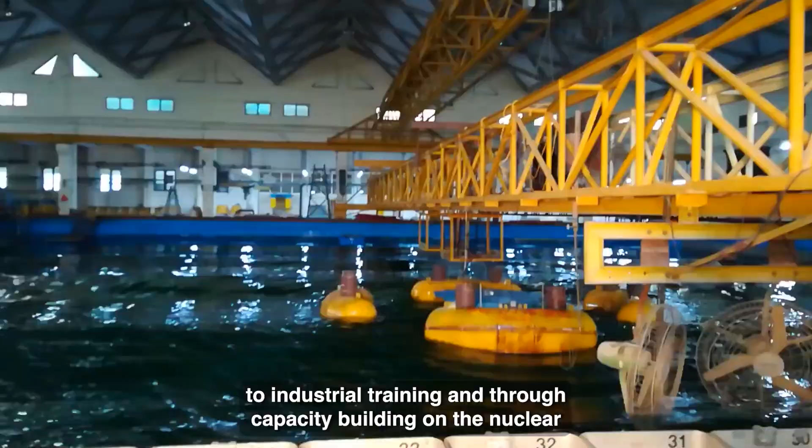This maritime engineering program is a very special, multidisciplinary program with input from mechanical, civil, structural, aerospace, naval architecture, chemical engineering, electrical, electronics, and applied mechanics. It is completely dedicated to industrial training and through capacity building in the new trade of the maritime sector. It's a growing economy offering many job opportunities and research frontiers as India grows, and the Blue Corridor effect planned by the Government of India is one of the important missions requiring maritime engineering growth. This program caters to that expected capacity building.

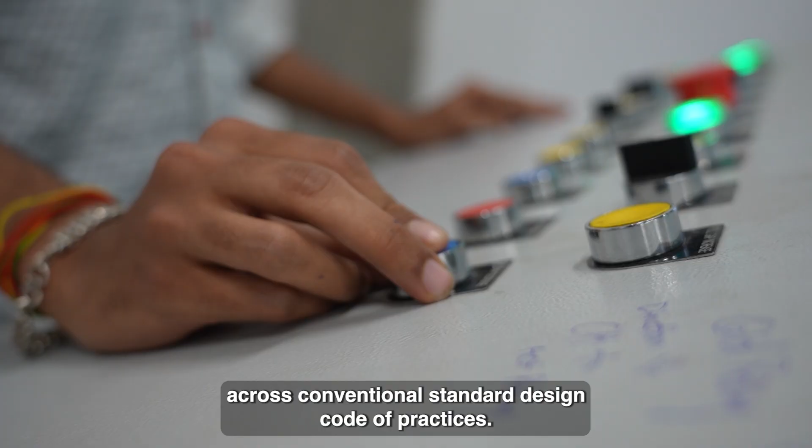This is part of the material science engineering laboratory, one of the teaching aids for the maritime engineering program. When we talk about materials innovation in the maritime industry, concrete and steel have been conventional choices for engineers, but now we have titanium vessels and high-speed craft boats made of fiberglass. These are advanced materials that do not come across conventional standard design codes of practice. We conduct box furnace tests, tube furnace tests, vacuum arc melting, induction melting, vacuum induction melting, and vacuum sealing in this laboratory, which is a small segment of the material science laboratory.

A typical furnace can test specimens at operating temperatures as high as 1200 degrees Celsius. Generally at room temperature and ambient conditions, mechanical properties will not alter much, but as you'll see in the course lectures, the strength of the material gets degraded when the temperature rises beyond 600 degrees. Therefore, in fire resistant design, you must choose an alloying element in such a manner that the strength doesn't degrade beyond 600 degrees Celsius.

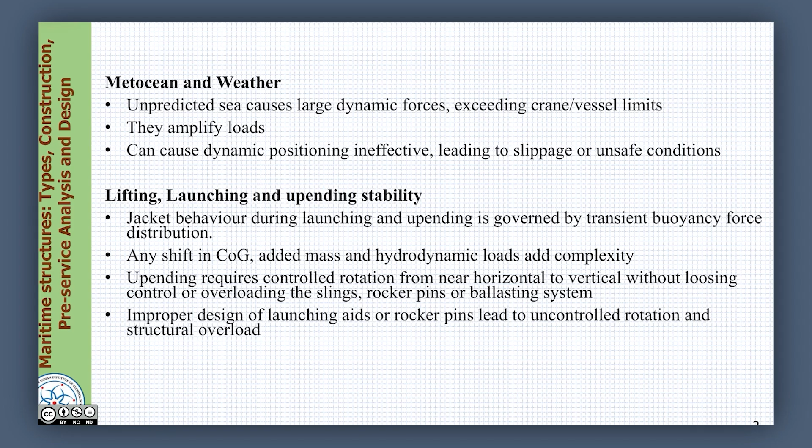When we talk about installation in offshore locations, two important phenomena come into play which govern the installation process: the weather and wave condition, which we call the metocean condition and the wave window or weather window.

Friends, in offshore conditions, sea can be highly unpredictable. Though there are models available to predict the amplitude, period and direction of sea depending upon the weather window and wave climate, we still call sea a random phenomenon.

An unpredicted sea can cause large dynamic effects on structures. For example, if these dynamic forces exceed the capacity of the vessel transporting the platform, or the crane hooking up the platform beyond its limits, it can be a big challenge.

So though you have a vessel or crane of certain capacity, the dynamic amplification caused on the structures by sea waves or wind can make them exceed these limits, and then it can cause a very serious problem. It can even result in capsizing of the whole platform which was fabricated for a specific use.

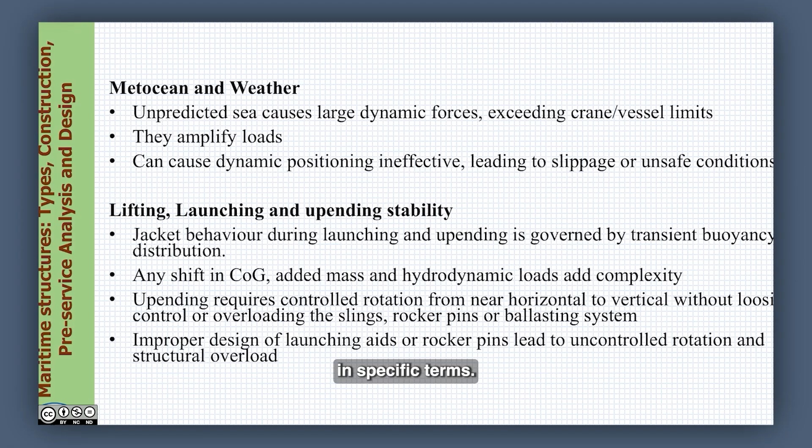So the dynamic effects caused by environmental loads such as wave and wind predominantly amplify the loads acting on them. In specific terms, these dynamic effects are referred to as the dynamic amplification factor.

These are dealt in detail in dynamic analysis of offshore structures. However, we will also touch upon certain effects of this in the coming lectures for our understanding. Dynamic analysis is a full-fledged course offered under the Swayam portal, which you can look into, but for the interest of learners we will cover certain aspects of this in this course as well.

So what we understand here is unpredicted sea waves amplify the load effects, which we call dynamic amplification factors. When these load effects are amplified, there is a possibility they can exceed the barge capacity and the crane capacity as well, which can be one of the major challenges.

Furthermore, it can also cause dynamic positioning ineffectiveness. When the dynamic positioning becomes ineffective, it can lead to slippage or unsafe conditions for installation.

So the installation process is completely governed by various factors: predominantly the metocean condition, the weather window or the wind and sea state conditions, and of course the capacity of the barge, capacity of the crane, and amplification factors, whether considered in design analysis or not. All these factors together can cause confusion or ambiguity in the whole installation process.

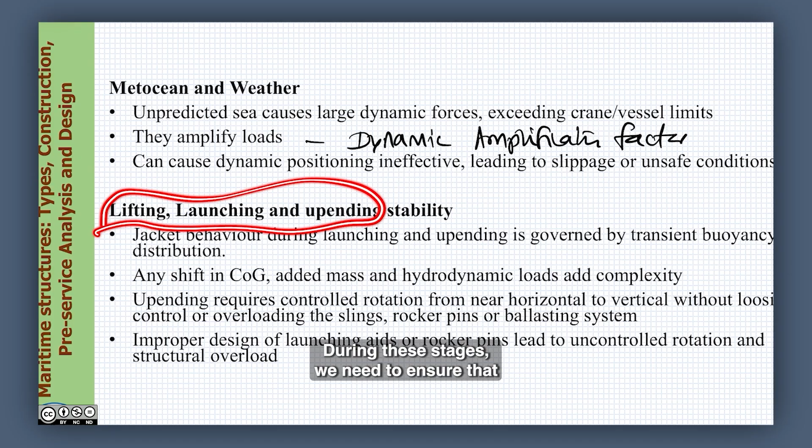During these stages, we need to ensure that not only does the jacket fabricated remain in place, but also that the vessel or barge carrying this during transportation remains stable. So here we are looking at different aspects of engineering.

We are talking about fabrication and welding, therefore we talk about material science. We talk about analysis and design of structures under wave combinations and wind load combinations, so we talk about structural engineering.

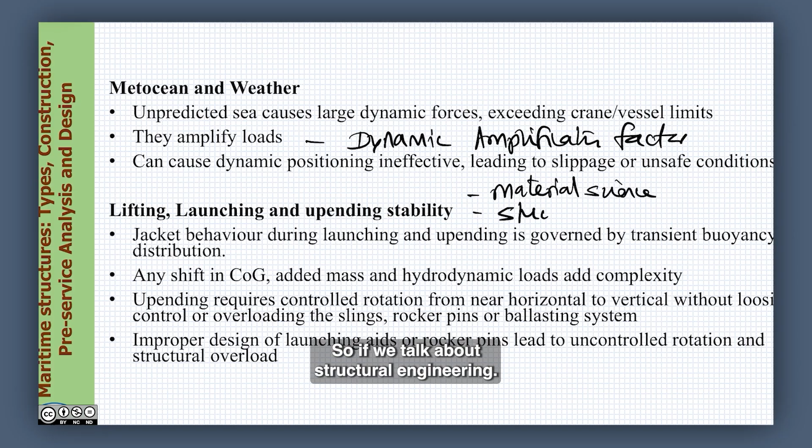We also talk about operations, planning and preparing the installation process, so construction management. And of course we also talk about the stability of the barge and supporting vessels helping in carrying out this operation, therefore naval architecture.

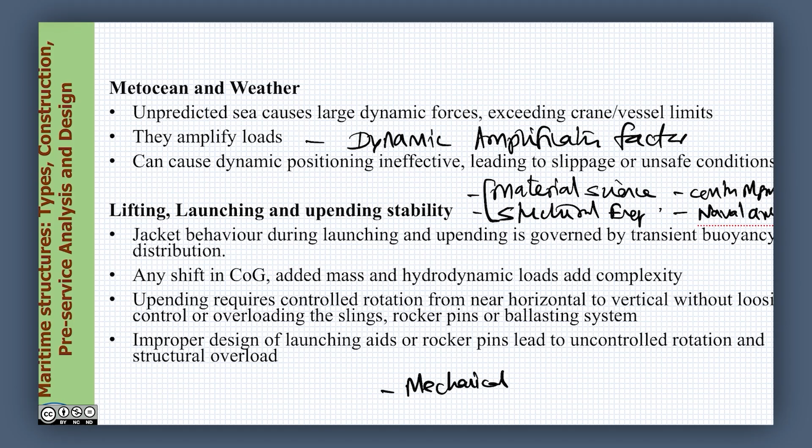So friends, various disciplines and various engineerings are involved looking into it: mechanical engineer, electrical engineer, naval architect, structural engineer, and of course material science and construction executive.

So various disciplines are involved, various specializations are involved. Therefore one can say, friends, installation is not only complex by its process, it is also complex by its knowledge domain.

Having said this, let us look at this specific complexity by imagining that we are going to now launch a prefabricated jacket onto a site of a specific location. The jacket behavior during launching and upending is essentially governed by a transient buoyancy force which is activated on this during the transportation process.

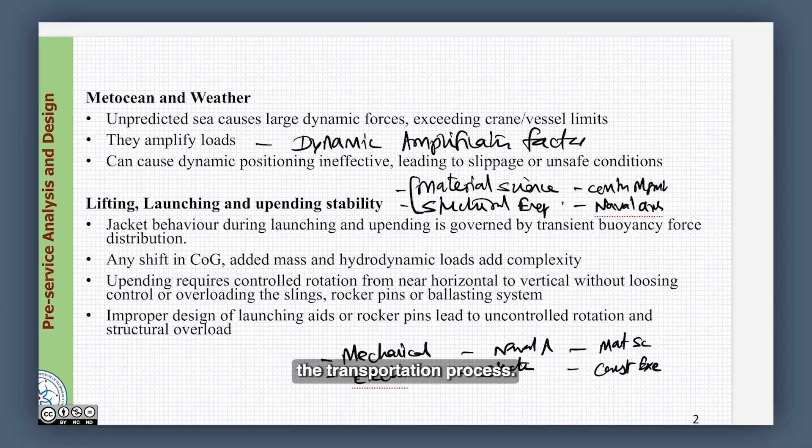When you have a jacket, which I will show step by step in the next slides - when you have a template structure or jacket, the center of gravity, which is the mass center of the elements involved, can get shifted because of its lifting and launching operations.

When there is any shift in the center of gravity, and where there is any added mass caused because of its partial submergence during the launching process, then the hydrodynamic loads acting on those members will further add complexity to the whole process. So friends, it is very important to consider the added mass effect and the hydrodynamic forces acting on the submerged or partially submerged members during the launching and upending processes, which are very important pivotal points in installing a jacket structure.

In this whole process, the mass center or the center of gravity of the whole system gets shifted.

When the center of gravity gets shifted, we understand that the structure retains or attempts to retain a CG by shifting the bodily rotation towards its center. That is a general tendency of any body to attempt to come to equilibrium. We call this specific property in offshore engineering as recentering. We already learned this in detail in previous lectures. I request listeners to go back to previous module lectures and reinforce your understanding before we take it forward from this point.

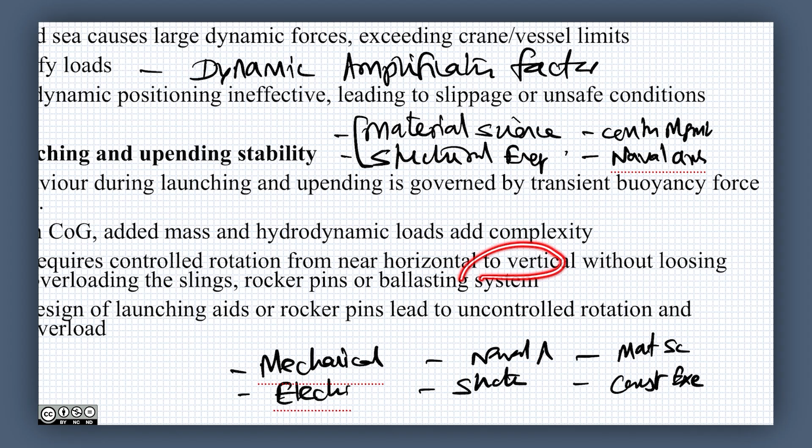So, friends, upending requires a controlled rotation, rotating the body from near horizontal to near vertical. During this operation, we cannot afford to lose control, we cannot allow overloading on the slings, we cannot allow any additional friction or load on the rocker pins or the ballasting system.

The ballasting system is part of the barge or vessel which is transporting the jacket from the fabrication yard to the place of installation. Ballasting is actually adding additional weight to the barge to maintain its stability. Deballasting is removing this weight from the body to again maintain stability. So ballasting and deballasting is a consequential operation that happens in all ships, and in barges as well, to maintain stability during flotation. We cannot afford to lose ballasting control.

Additional rocker loads on rocker pins or overloading on the slings of the crane hook can initiate failure because of slippage from the crane drops. So, friends, lifting, launching and upending stability actually governs the whole operation of installation, for example in a jacket platform. Having said this, let us see what is the further consequence or complication that happens in the installation of a jacket.

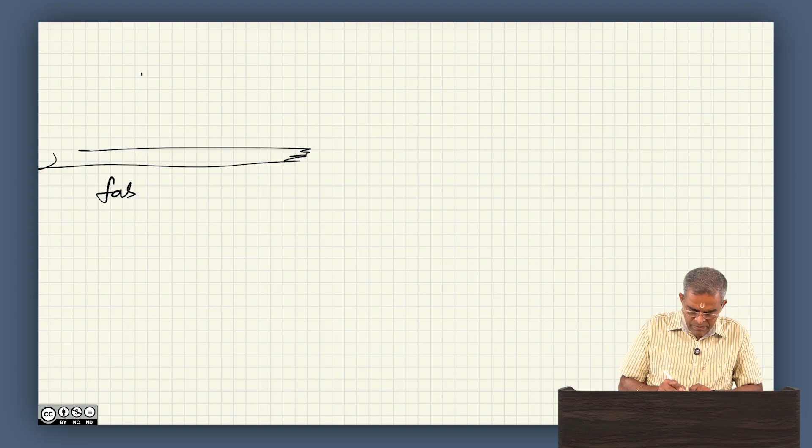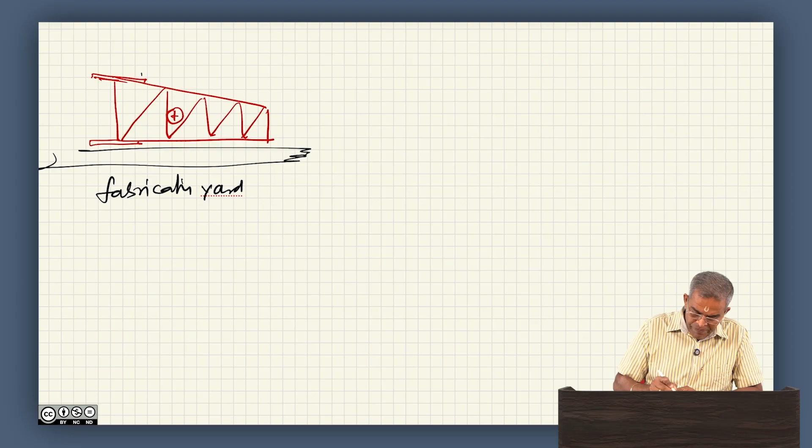Once the jacket is transported, let us recollect the steps involved that we learned in the previous lecture. We said that I have a fabrication yard where a jacket is fabricated. Now, the jacket has got a specific CG or COG where the mass center is located. In the fabrication yard, we have rocker pins, and we have slide rails, where the jacket is virtually pushed along the rail towards the rocker pins. When it is pushed towards the rocker pin, the barge is here. Let me draw the barge as well.

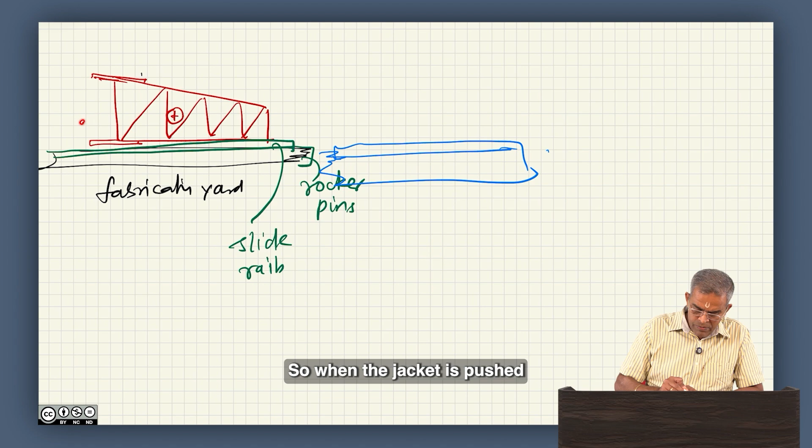Let us say this is the barge. So, when the jacket is pushed and launched on the barge at the rocker end, it is essentially moving, and when it reaches this stage, the barge is partially loaded.

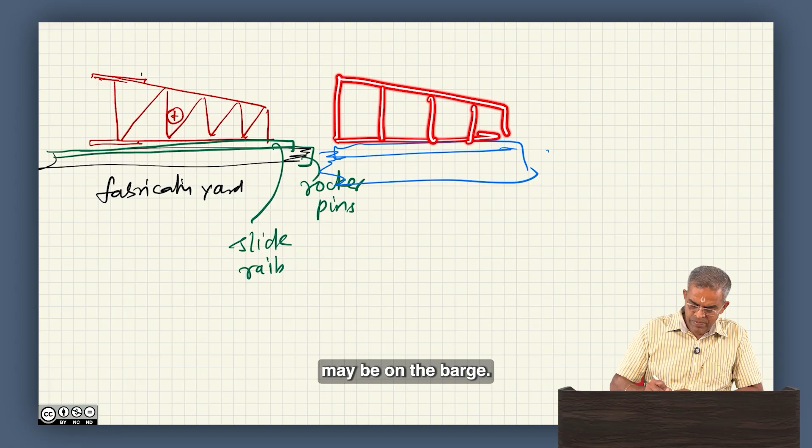Remember that the barge, when symmetrically loaded, is stable. When the barge is partially loaded, there is a probability that it may experience excessive roll or excessive pitch. So, this has got to be controlled by ballasting the barge to create an additional counterweight to balance this. Once the jacket is completely placed in position on the barge, then there can be a perfect balance of load.

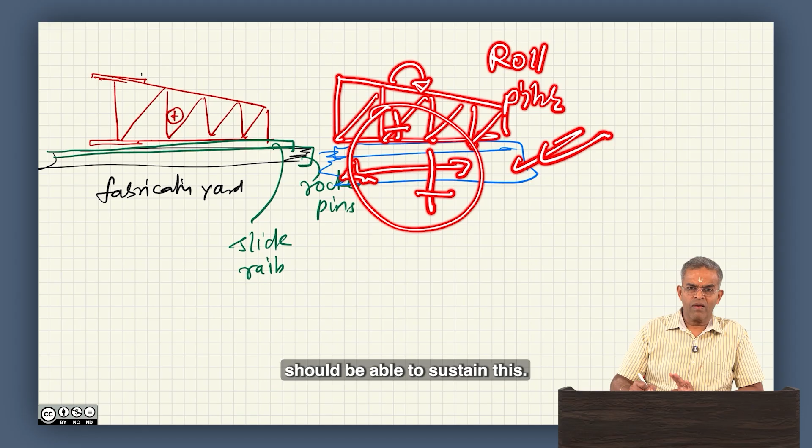Still, remember, the CG of the barge and CG of the platform may not be the same. It can cause an additional moment which can induce roll or pitch to the barge, for which the barge should be able to sustain this. That goes without saying. But however, there is expected to be a balance of the load acting on the barge, for which the barge stability is already ensured.

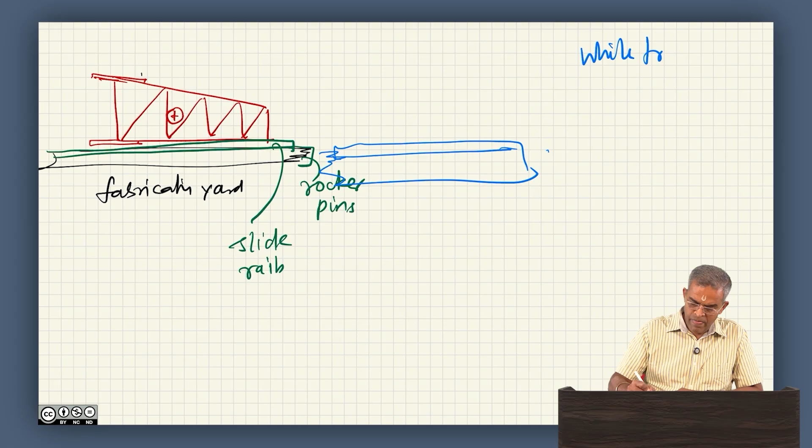So now we have launched the jacket from the fabrication yard onto the barge. Now the barge is moving, we are transporting. When you are transporting, the wind effects while transporting, the wave effect, and the current, in addition to the dead load of the jacket should be taken care of in the design.

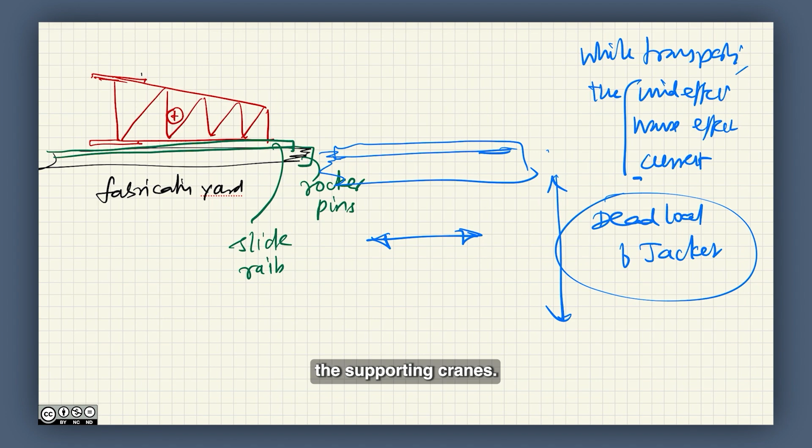The jacket should remain stable during the transportation process. Remember, the barge will also have supporting cranes to help this process. So the jacket placed on the barge will be also held in position so that it does not move.

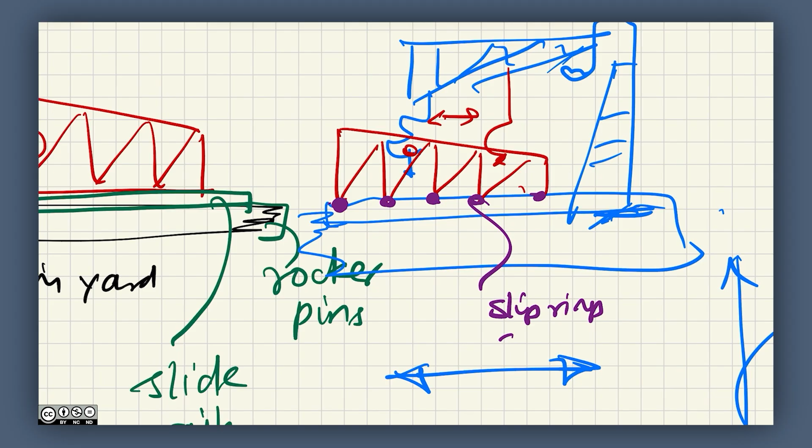In addition to this, friends, both on the barge and on the jacket there are slip rings and sea fasteners, which are placed in position so that the jacket is locked on the barge. You must have seen this, a very interesting operation, which I can give a very simple example to recollect.

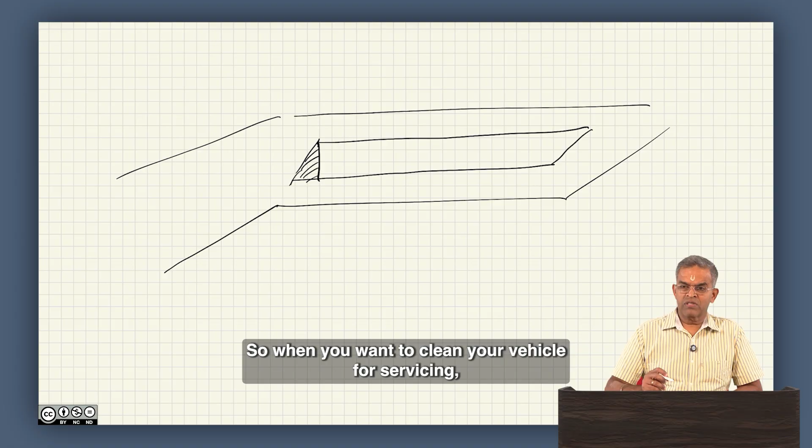Let us say you have a ramp arrangement, and the ramp has got a design like this, whereas this portion is hollow. So when you want to clean your vehicle for servicing, what we generally do is bring the vehicle onto the ramp, and move the vehicle so that the wheels are placed here. Once they are placed here, you must have noticed that these wheels are locked.

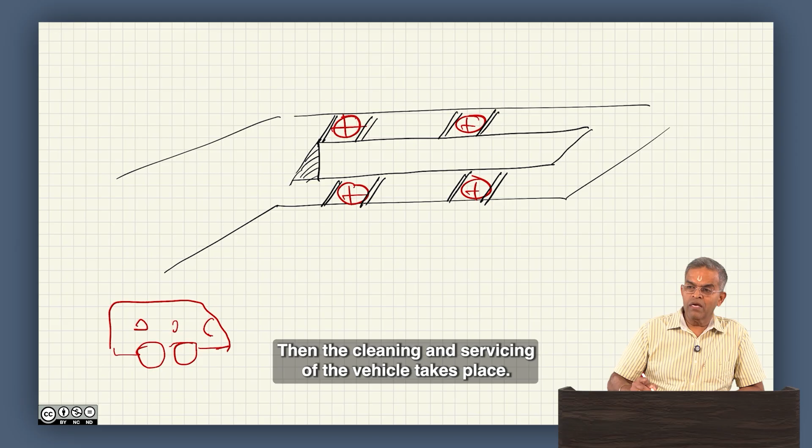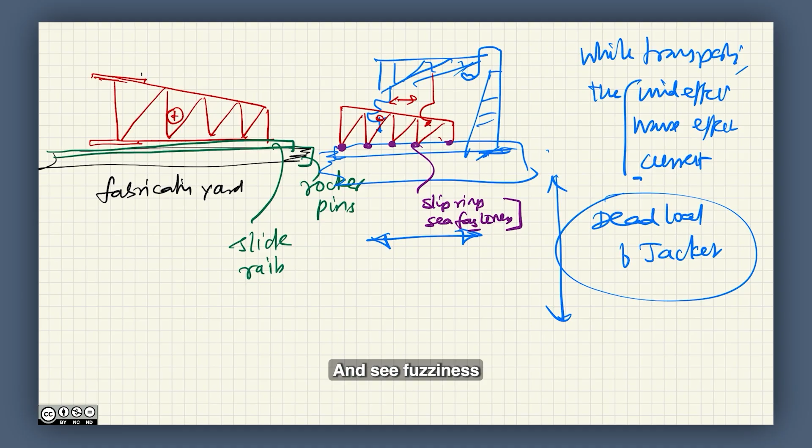Then the cleaning and servicing of the vehicle takes place. Similarly, in aircrafts, when the aircraft is parked on the bay, you would see the wheels of the aircraft are also locked, so that the aircraft does not move when loading, unloading cargo, or passenger embarkment takes place. Similar to this, friends, I have here slip rings and sea fasteners to hold the jacket in place, so that the jacket does not move to and fro or oscillate or slide when the barge is moving.

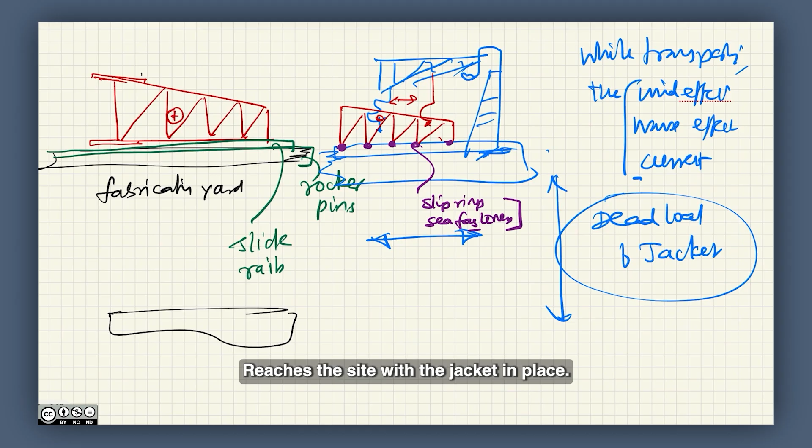So now we have placed the jacket on the barge. Now the barge is moving, we call this transportation. When the barge reaches the site with the jacket in place, now the jacket has got to be placed in position. Let us say this is the probable location where the jacket has to be installed. This is sea level, this is water level.

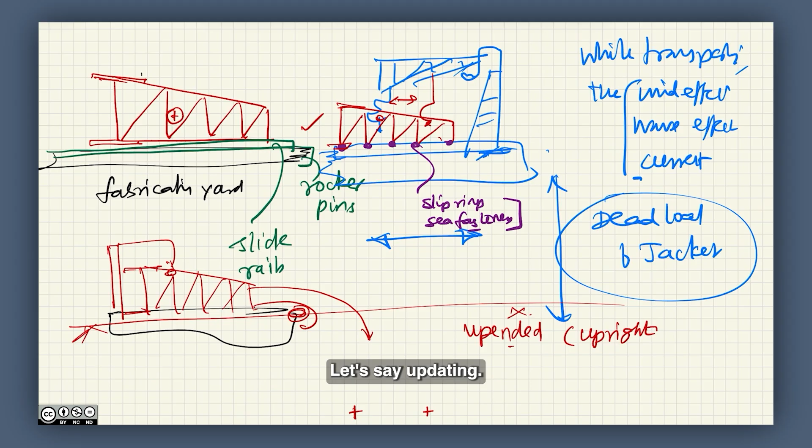So now I have to have a crane which holds the jacket, and the jacket is slided with a rocker in the same manner as you see here, and it is upended — let us say uprighting. During this uprighting, you will notice that some of the members may get partially submerged, some of them may not, is it not?

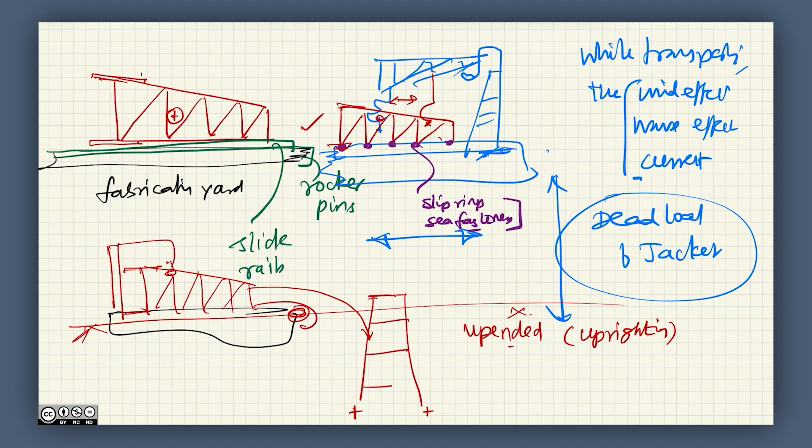The partially submerged members will have added mass effect and additional hydrodynamic forces, for which this should be designed. So now once it is upended and the jacket has become vertical, you have to do the pile driving.

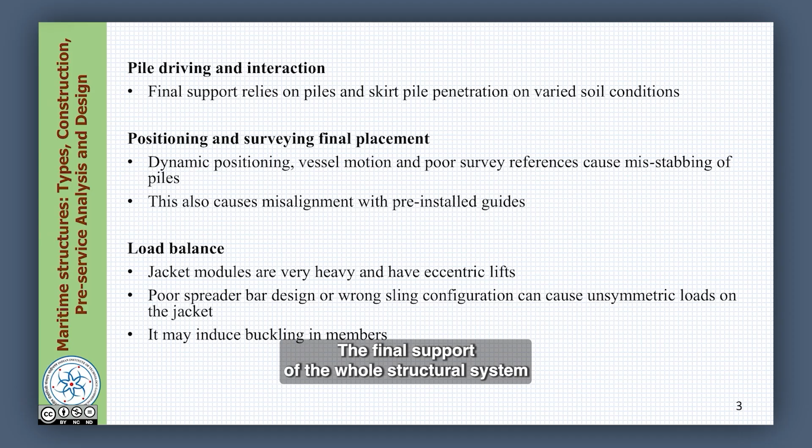So we are now coming to the complexities involved in pile driving and interaction. The final support of the whole structural system relies on how strong and how firm the piles are driven into the seabed and how they are firmly connected to the structural system of the jacket. So the pile penetration and the skirt pile penetration on varied soil conditions govern the important aspect of successful installation of a jacket on site.

When I say pile driving, we are talking more importantly about the soil structure interaction. Remember, friends, on ground or on site onshore, the soil may not be as wetted as it is in sea. Therefore, the marine clay or marine soil conditions and composition are different from that of the soil on shore or on site in ground. They can be different. Even if you have a submerged water table, even then the soil conditions in marine or maritime systems can be different from that of soil conditions under a dry state system on earth or onshore.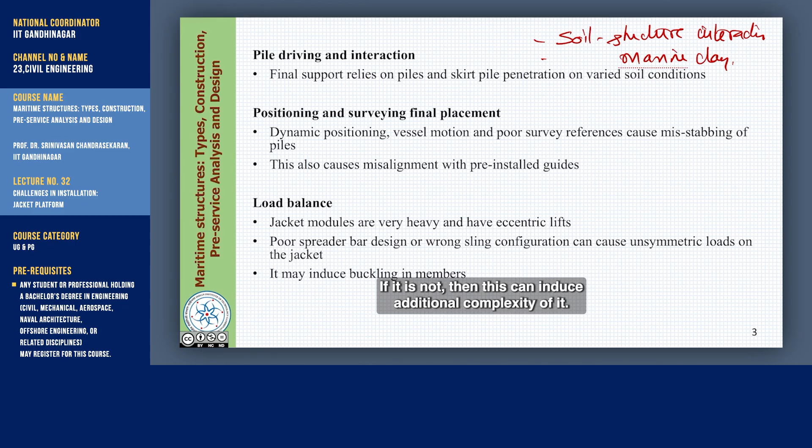Therefore, friends, the pile driving, pile positioning, and then fixing the structural system to the pile properly has got to be taken care of carefully. If it is not done, this can induce additional complexity of failure.

We are now looking at the different processes involved in installing a maritime structure, for example a jacket platform, and looking at every stage how this can induce additional forces which can cause failure or complexities in the whole process. Now, once the pile is driven properly and fixity is ensured, then comes the question of final placement.

What we call positioning and surveying the final placement. The jacket has got to be placed in a specific position, because it is not simply to be placed wherever you want. It is to be placed at a geographic location where oil exploration can take place. So we have identified the spot, we know the location, and the jacket must be placed at the specific location with practically zero tolerance. To ensure that, we need to check the dynamic positioning and survey of the final placement once it is commissioned.

Dynamic positioning, vessel motion, and poor survey references can also induce a mismatch in the whole process of commissioning, what we call misstabbing of the piles. The piles must have been stabbed at a specific geographic location, but if there has been a wrong survey, misstabbing happens. In many offshore projects, friends, many piles might have been driven in the wrong location and are lost, and these are all added cost as well as added complexity in the whole construction process.

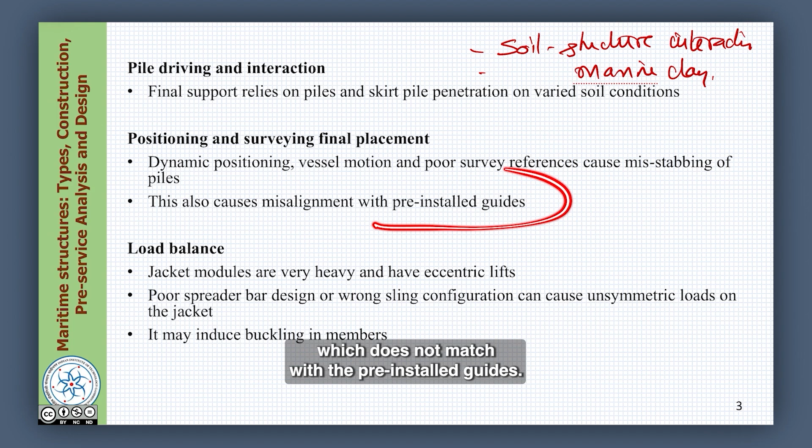This can also sometimes cause misalignment which does not match with the pre-installed guides. We already have a template installed on the seabed, and the pile should go and sit in that specific template location, but there are possibilities where misalignment happens and it does not sit in the specific location. Of course, there are tolerances for all kinds of jobs, but practically we wish to achieve a zero tolerance procedure.

During this whole exercise, friends, remember that there is a perfect load balance to be maintained. We are working offshore now, not land based, so you cannot put a lot of extra supports to hold the system until the load transfer mechanism happens. Here the jacket is upended and resting on the seabed on its own weight, but of course external excess buoyancy will try to push the jacket upward and so on. We need to check the load balance.

We understand the jacket modules are very heavy and sometimes they have eccentric lifts also. You have seen a jacket geometry in the previous lectures. Because of appurtenances attached to the platform system, the weight or the center of gravity may not be exactly at the center in terms of its vertical axis. There can be some eccentric lifts which can happen during the upending and launching operations.

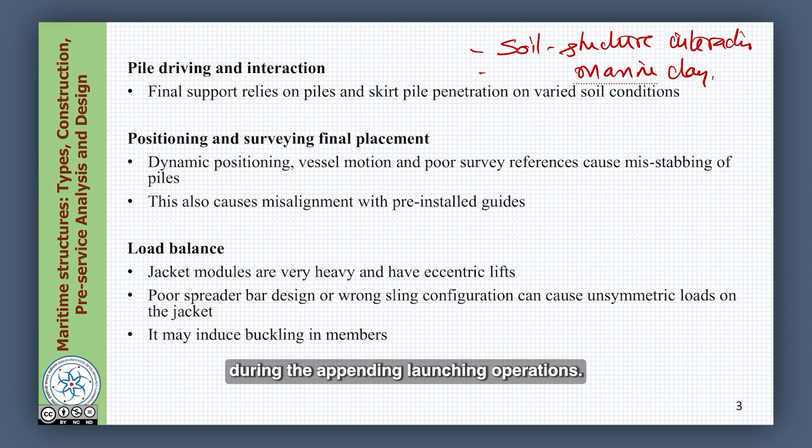Therefore, friends, poor spreader bar design or wrong sling configuration can induce unsymmetric loads on the jacket. We already saw in a previous lecture what could happen if a member is under unsymmetric loading, and we discussed this very clearly. We also learnt about it when the wrong sling configuration of a crane hook is used, and what kind of additional stresses are induced in curved beams, which we saw in the derivations in previous lectures.

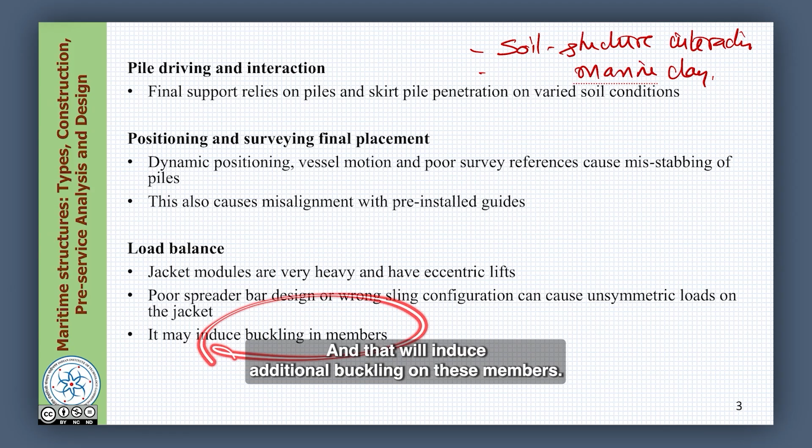So, during operation there can be a possibility of unsymmetric loading happening on the jacket. The most important worry here is that since the jacket members are long and slender, because we want to avoid the number of connection points due to welding complexity, and we cannot afford lots of intersection points since they induce stress concentration—which we will talk about in coming lectures—the members are usually long and may become slender, and that will induce additional buckling on these members.

We already know the buckling load capacity of a member is far inferior compared to its axial load capacity. Let me quickly compare this for your understanding. Axial load capacity, or axial stress, is simply load by area. Whereas to compute the buckling load, we talk about pi squared EI by L squared, the Euler's buckling load, which depends not only on the configuration but also on the flexural rigidity of the member—the moment of inertia about the bending plane and the length between connection points, otherwise called the effective length, which plays a very major role in controlling this. So, in general, friends, with this information we can say that the buckling load capacity of a member is generally lesser than its axial load capacity.

A member may be safe under axial load but become unsafe under buckling conditions. Buckling can be induced during construction due to two reasons: eccentric lifts and sudden slip caused by wrong sling configurations. Once the member buckles, its load carrying capacity gets degraded, and the jacket cannot sustain the design load.

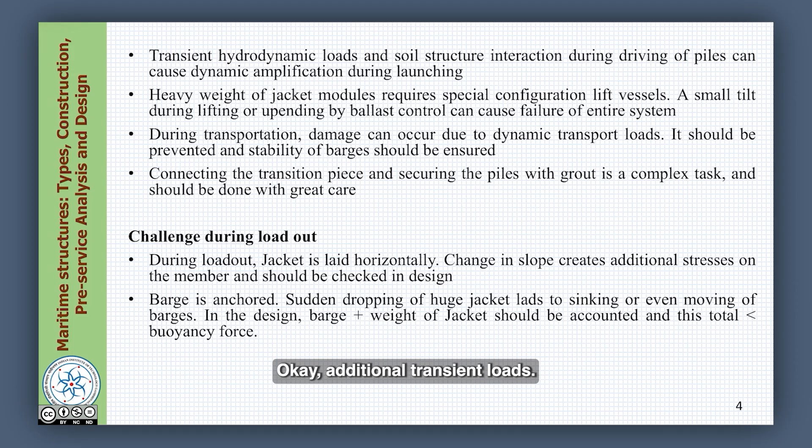Transient hydrodynamic loads arise from additional wave swelling effects. These additional transient loads do not remain for long but have an impulse effect on the member, attacking it during installation. These are additional loads for which the members are not designed to sustain. Such transient hydrodynamic loads, combined with complex soil structure interaction during pile driving, can also amplify the dynamic effect during launching.

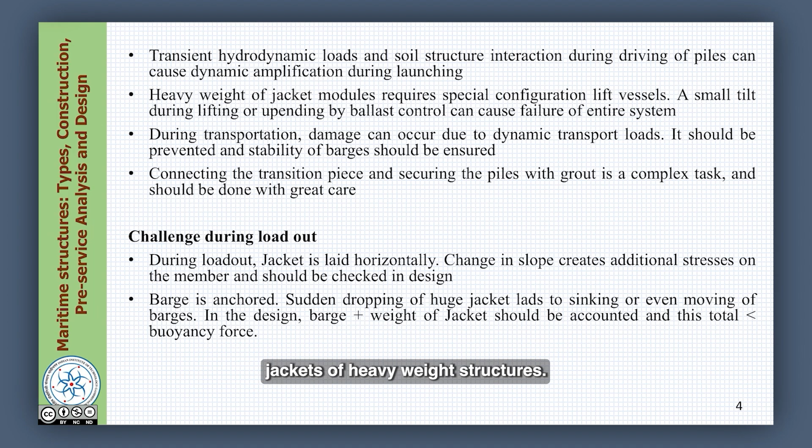Jackets are heavy weight structures, so special lift vessels are required to hold them. We cannot use a conventional barge for this. Launch vessels are configured to maintain balance during transportation or launching, so we need specially configured vessels for transporting jackets.

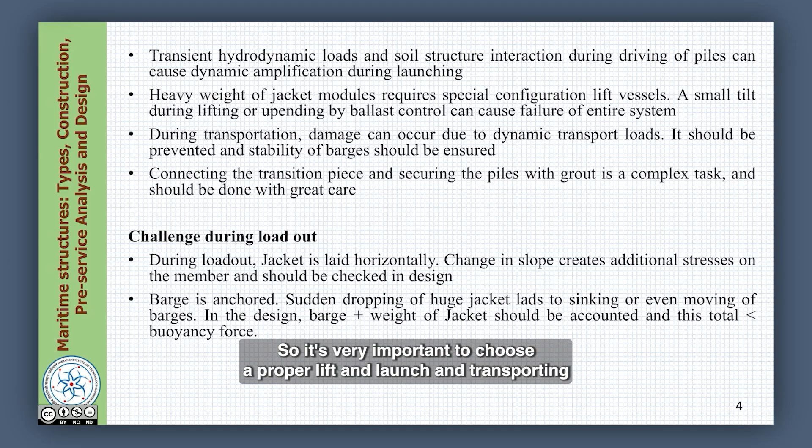A small tilt during lifting or upending by ballast control can cause failure to the whole system. So it is very important to choose a proper lift, launch, and transporting vessel or barge to perform the jacket launching. During transportation, the jacket is transported from the fabrication yard to the installation site on the barge.

Damage can occur during this transport period, so it should be prevented and the stability of barges must be ensured. Generally, when the jacket starts tilting about its center of gravity, which is not essentially at its center, this can cause additional roll and pitch on the barges, worsening hydrodynamic instability. So barges should be tested and their stability ascertained during the transportation operation.

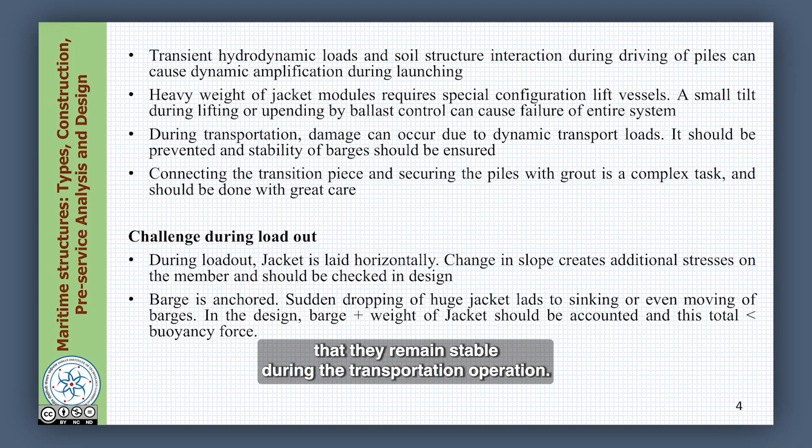Connecting the transition piece, which is essentially the joint between connections, and securing the legs with the piles using grout is a very complex task because all of this has to happen underwater. Poor visibility, poor accuracy checks, a prolonged and fatigue-based construction process, and delayed, uncomfortable weather windows can all add to the complexity. These factors should be taken care of with great care.

Now let us see the challenges in different stages of installation. First, load out. Load out is the process where the jacket is loaded onto the barge from the fabrication yard. During load out, the jacket is generally laid horizontally and gently tilted using rocker pins.

The change in slope while tilting can create additional stresses on the members. You have a straight body; when it is tilted, the mass center shifts and the stress concentration on the joints of the member varies. So one has to be very careful that additional stresses caused during this operation are checked.

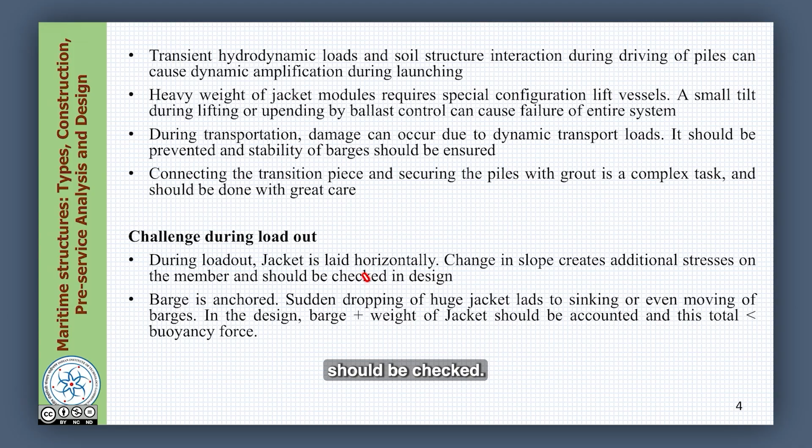When the barge is anchored in position to hold the jacket, a sudden drop of a huge jacket can also cause imbalance on the barge. You have a barge, and you have a jacket which is huge in size.

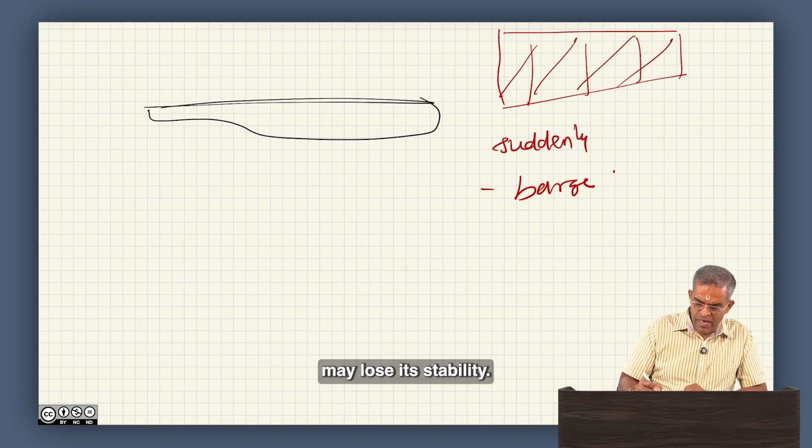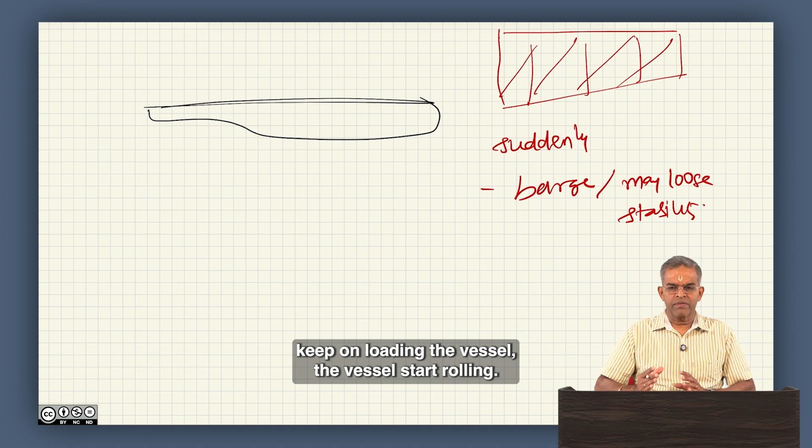When you start loading this onto the barge suddenly, the barge may lose its stability. You must have seen this when boarding a passenger vessel from the coast - as people keep loading, the vessel will start rolling, and somebody has to help hold your hand to bring you from the port to the vessel. Similarly, when you leave the vessel, if it is very large and stable, you will not notice this roll motion, but if it is not that stable and large, you will notice the roll is quite significant. So when you have a load out operation, suddenly or any slip happens, this will increase destabilizing condition onto the barge.

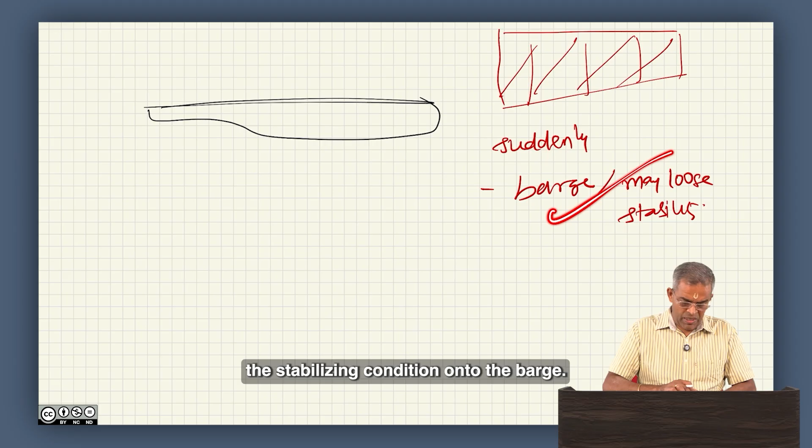So the barges, if loaded suddenly, can cause destabilization. Sometimes, friends, it can even cause sinking of the jacket because the barge will move, though it is anchored. The barge will move and the jacket will sink. Of course, there are crane hooks and slings which will hold the jacket from the fabrication yard, which can be recovered, but the operation is unsuccessful.

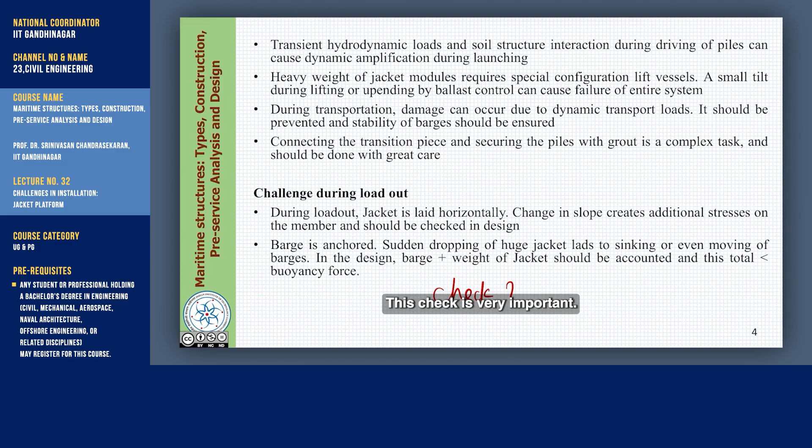So therefore, in the design, barge plus weight of the jacket should be accounted, and this total should be lesser than the buoyancy force acting on the barge. This check has to be done - this check is very important. The barge plus weight of the jacket should be lesser than the buoyancy force acting on the barge. This has got to be checked to ensure that the barge will not get into destabilizing mode when the jacket is loaded out onto the barge.

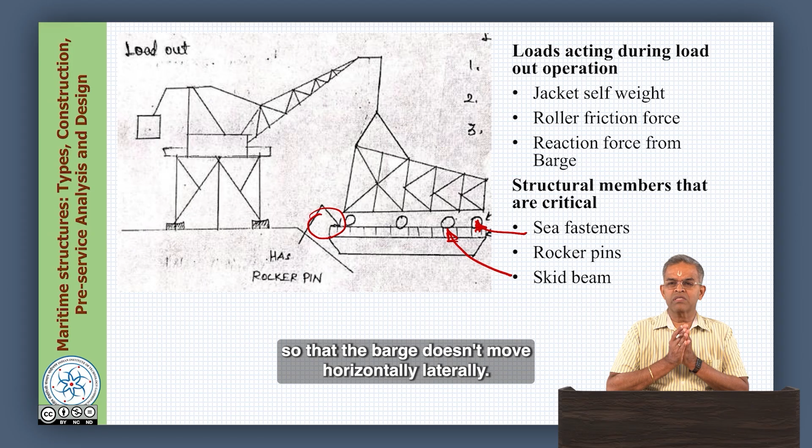Skid beams are used to move the jacket to and fro during the launching and load out operations, and rocker pins enable the jacket to rotate, which helps load out the jacket from the fabrication onto the barge. So these are very critical elements which need to be taken care of in the check.

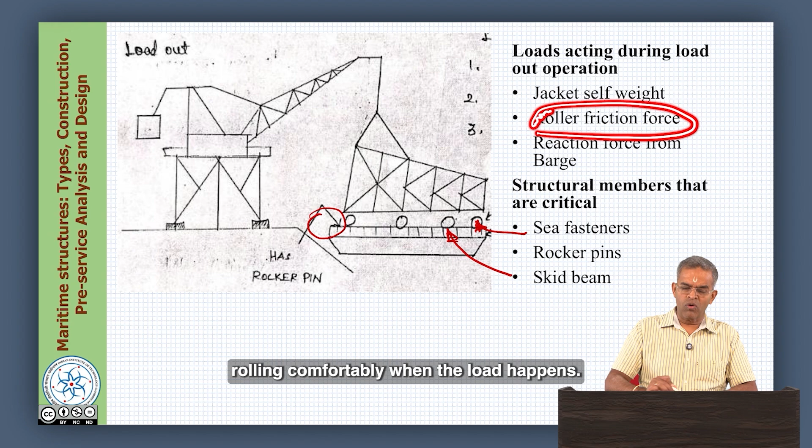Let us see what loads act during the load out operation. Of course, the self weight of the jacket is very important. The rollers where the jacket skids and rolls over - the friction force on the roller plays a very important role. The roller should sustain this force so it does not get damaged and enables rolling comfortably when the load happens. When partially the barge is loaded, the reaction force from the barge should be counted for - the barge should not move, nor should it get destabilized during the load operation. So the jacket self weight, roller friction force, and reaction force from the barge comprise critical force combinations in the load operation. This is operation number one.

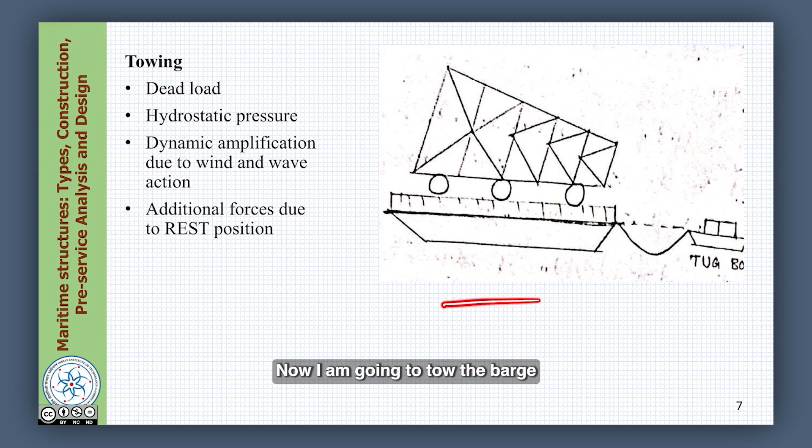Once loading out happens, the jacket is on the barge. Now I am going to tow the barge using a tugboat. During towing, as we all know, the jacket should not move, is it not? So the sea fasteners will lock the jacket with the barge so they will not move. Then what are the forces acting here?

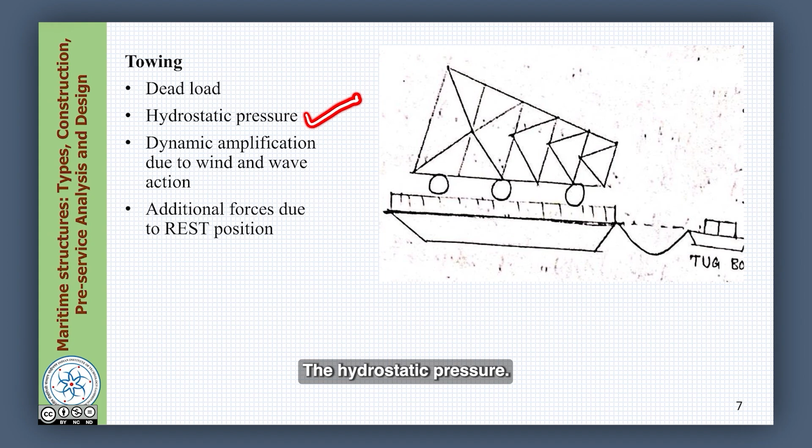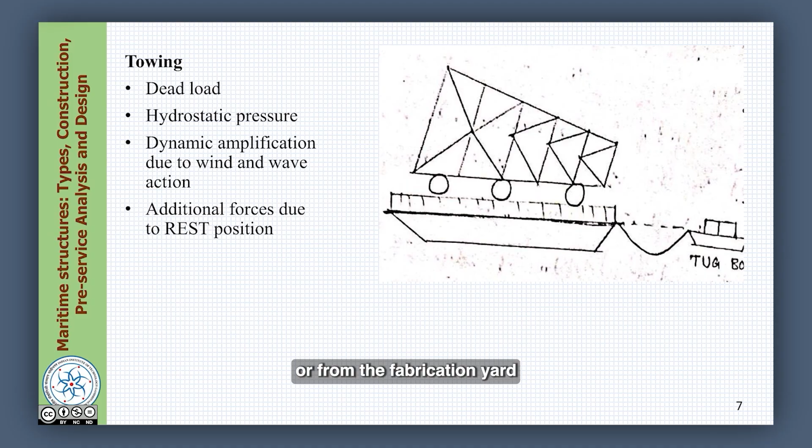The dead load of the barge plus the jacket, the hydrostatic pressure caused because of this towing, and the dynamic amplification because of wind and wave acting on the barge, and wind acting on the jacket - they will all get dynamically amplified during the towing operation. Further, there can be additional forces when the barge is at rest position, because the tugboats cannot continuously pull this from the fabrication yard to the destination. Under rest position, the whole system becomes an integral unit subject to wave and wind action. If the jacket is not placed in relation to the CG of the vessel, and if it is tilting because of failure of fasteners, this will induce additional moment on the barge and the barge may get destabilized. So these are the forces acting during the towing operation, the second operation.

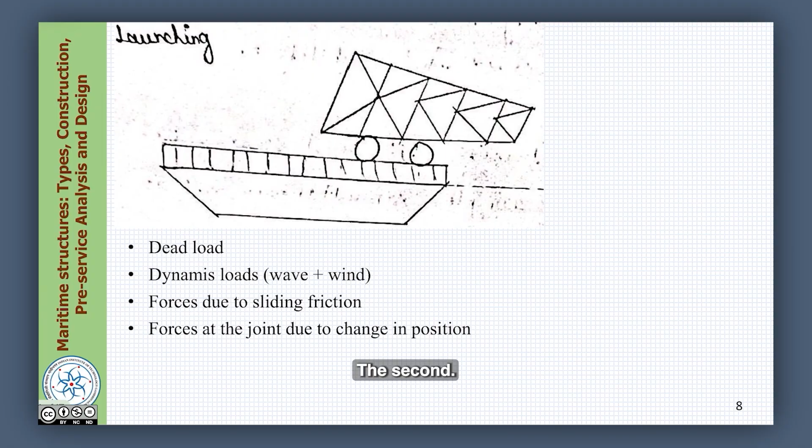The third one is the launching, that is, from the barge I have got to push out the jacket onto the site. This is called launching. During launching, what are the forces acting or what are the forces governing this operation?

One is of course the dead load. Friends, please note, when the jacket is getting launched, when the CG is shifted away very much from the CG of the vessel, it will now experience rotation, is it not? This will now encounter excessive roll. The vessel should not get destabilized during this operation. How do you do that?

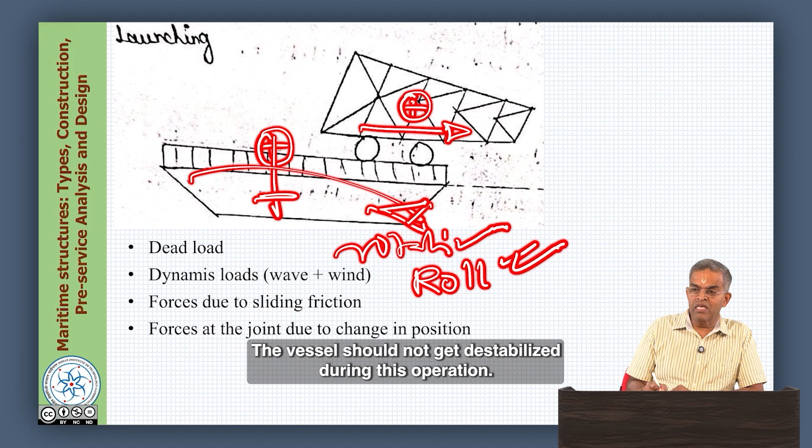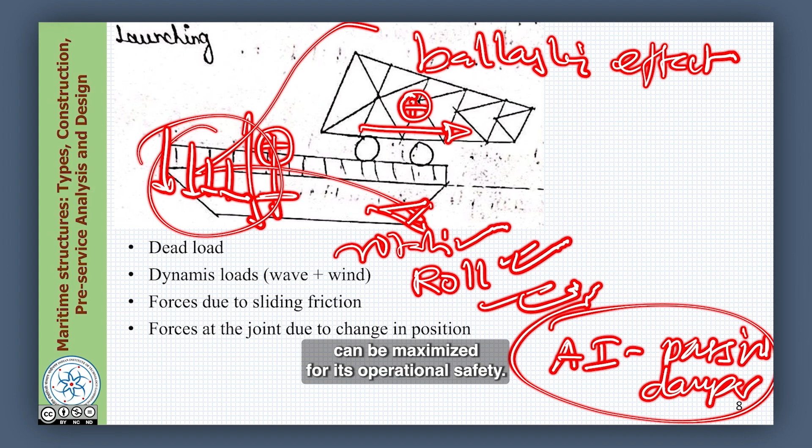You have the ballasting effect here, which will counteract the weight, add ballasting weights here to control this additional roll. There are of course additional methods by which the roll control can be done. We have explained this process for a drill ship using AI driven passive dampers. This can be a very interesting PhD research problem where the whole launching load out operations can be maximized for its operational safety in the maritime sector. This can be a research problem where I invite people to undertake this research under our guidance at IIT Madras.

So let us see what are the additional forces that critically govern the launching operation. As we said, excessive roll, caused by the dynamic effects of wave and wind, forces caused due to sliding friction, because it is sliding now, can have a friction force, that can be an additional force. Forces at the joint due to change in position.

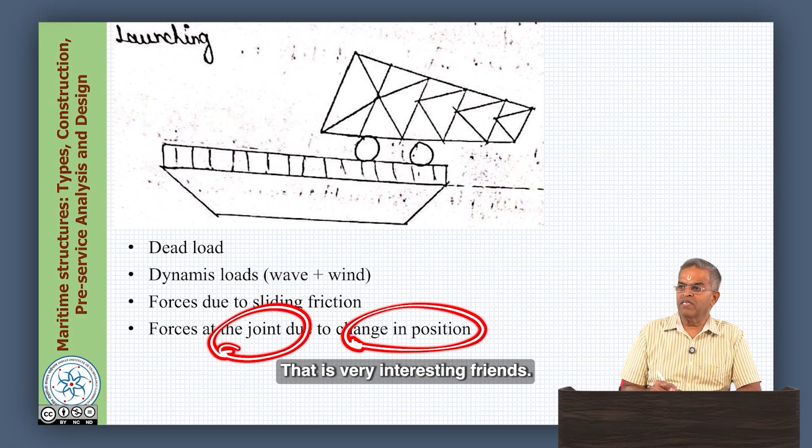That is very interesting, friends. Even in the jacket, when the position is changed from here to here, the joints will now experience different forces. So these joints should be checked for that kind of operation in the analysis. So during launching is a third operation. So let me write down these operations very carefully.

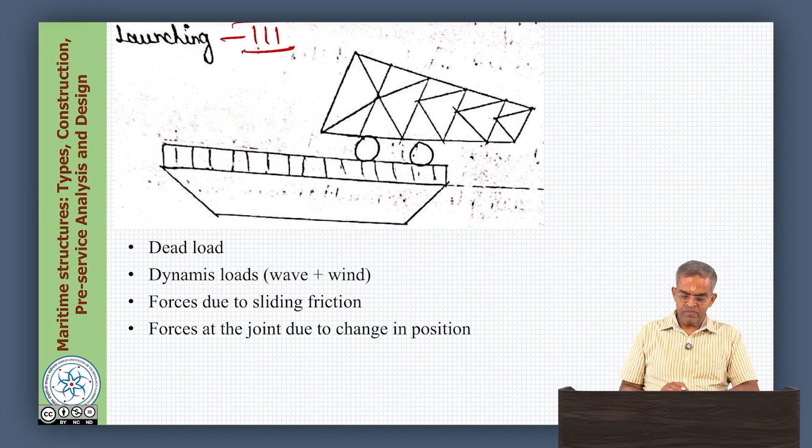Let us say load out operation is stage 1, towing is stage 2. Once towing is done and is reached the site, then launching is stage 3. Then comes the floating. Let us say the jacket is now launched in sea, of course it is held with the crane. Now it is floating, and then gradually it is uprighted. So we can also call this as uprighting or upending. So let us say this becomes the 4th stage, this becomes the 5th stage.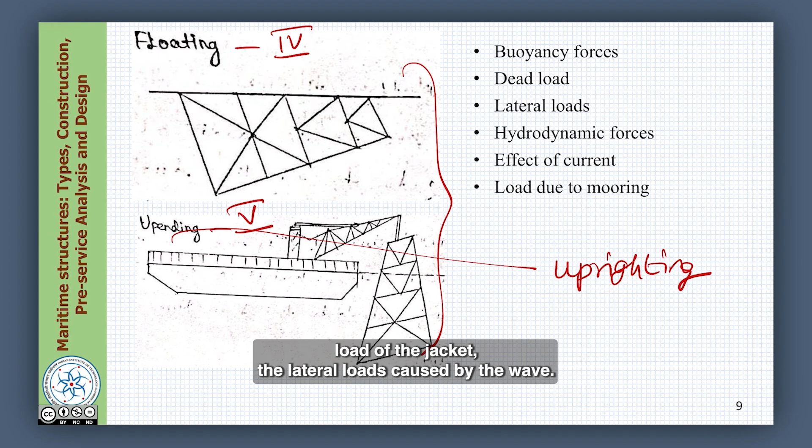During this stage of construction, the critical forces governing them are the buoyancy force, because buoyancy will now govern the design as it is floating, the dead load of the jacket, the lateral loads caused by the wave and wind. Of course the wind effect is lesser, wave effect is phenomenal. Effect of current plays a role here. Current is most predominantly present on the surface of waves. Current is very effective here.

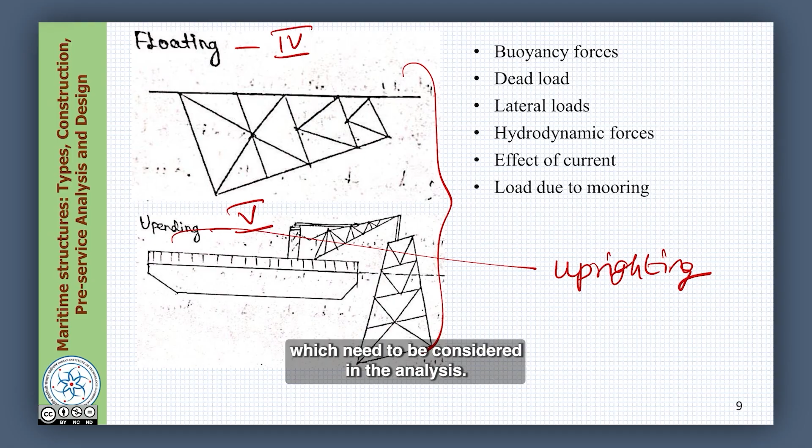Hydrodynamic forces caused by waves and the load due to mooring of the vessel, that is a very important governing factor here. The barge should stay in position during upending. If the barge moves, the barge is unstable, then upending cannot happen properly. So during floating and upending, these are the governing forces which need to be considered in the analysis.

Once the jacket is in the vertical position, let us say operation 6, in vertical position, then piles need to be driven. So I now worry about the soil structure interaction, the dead load and the wave force and current effects acting on the jacket now.

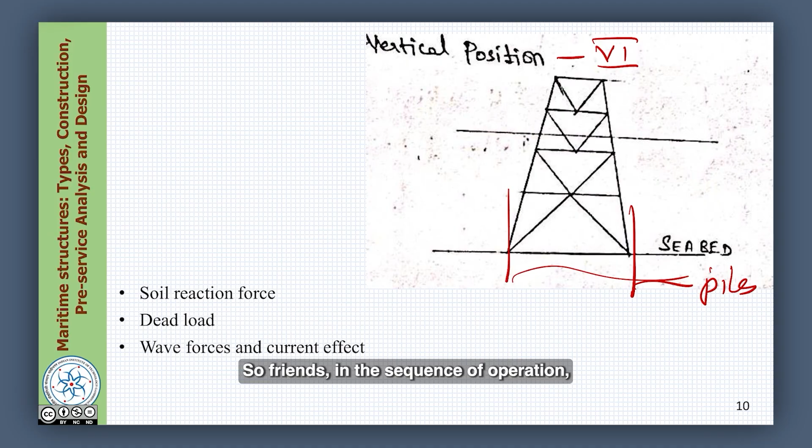So friends, in the sequence of operation, what we like to recollect again: fabrication, of course one part happening on the land, then load out, then towing, then launching, then floating, upending and vertical position. So these are the different stages of installation in maritime structures. This is generally applicable to all large maritime structures like gravity based platforms, jacket structures, guyed towers, large floating structures, etc.

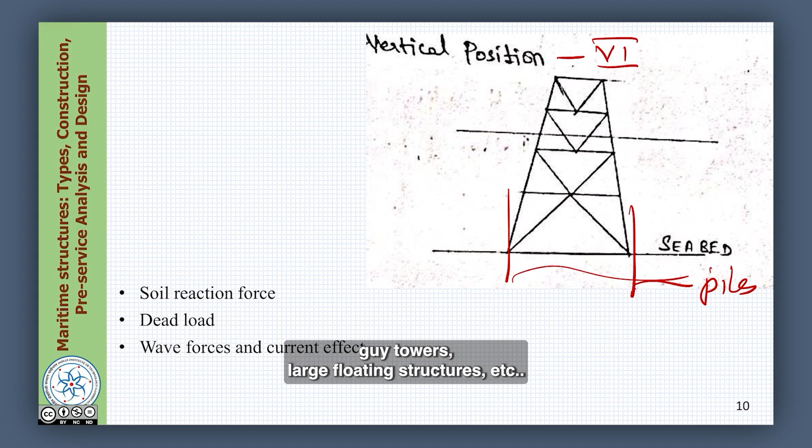Let us talk a few minutes about the planning and execution during the installation process. The installation plan should be prepared including the methods and procedures for the load out operation, sea fastenings and transportation. Installation process has different phases, as we saw: load out, sea fastenings, transportation, installation.

Let us try to understand more about the sea fastenings. Sea fastenings are actually ties and fastening locks together, which are used to hold the jacket on the barge during the transportation or during the launching operations. They should be designed in a proper manner, provided both in the barge as well as in the jacket, and the major function of them is to prevent sliding and shifting while they are in transit.

Example, when the aircraft is landed, the wheels are locked. When you are leaving your car for servicing, the wheels are locked. This lock is what we say here as sea fastenings.

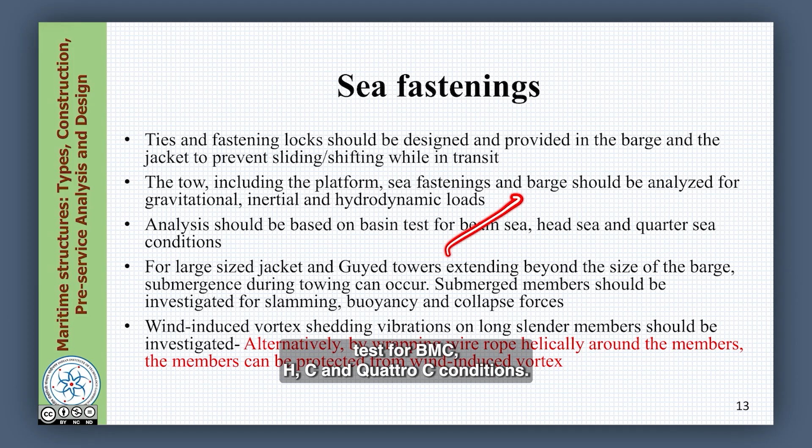During towing, including the platform, sea fastenings and barge should be analyzed for gravitational, inertial and hydrodynamic loads. Analysis should be conducted based on the basin test for beam sea, head sea and quarter sea conditions. For all conditions of wave direction, you must check the analysis for its safety.

Now friends, a very peculiar problem. I have a barge, let us say of a specific capacity.

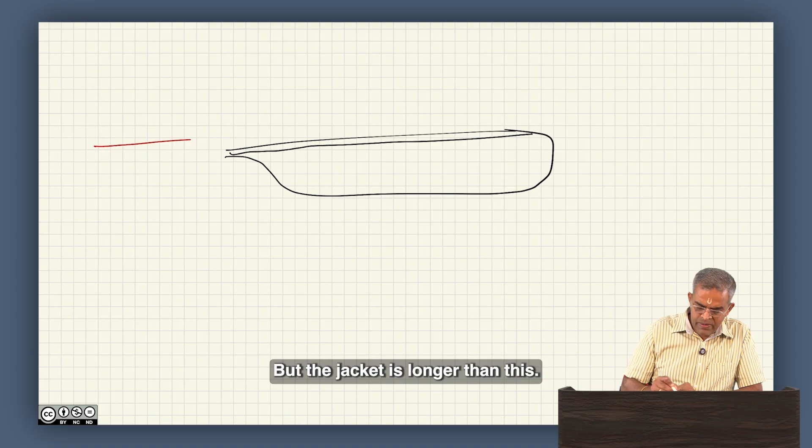But the jacket is longer than this. Okay, it can happen. You must have even seen on trucks where people carry large pipes longer than the chassis of the truck. It happens. You must have noticed that they try to place the pipes at the CG of the truck.

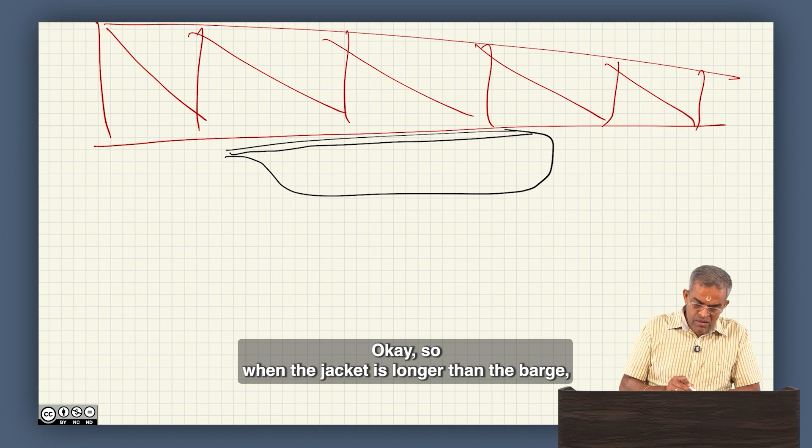So that the members do not bend. If this would have been placed like this, you will notice that these members will experience excessive bending and buckling. So, when the jacket is longer than the barge, the problems are slightly different.

For large size jackets, when they extend beyond the size of the barge, submergence will occur during towing. This submergence will have added mass effect and additional forces caused by wave slamming, buoyancy and collapse forces. They should be checked in the analysis and design prior to the design being completed.

Furthermore friends, when the jacket is being towed, if it is longer than the barge, it will also cause wind induced vortex shedding vibrations. This will cause second order effects on the member stresses. To avoid this, one can bundle the whole jacket by wrapping the wire rope helically around the members. This can save the jacket under the effect of wind induced vortex shedding vibrations. So, there are problems, and there are solutions also available in the literature.

So, by experience, the maritime engineer decides what kind of barge he hires, how he places the jacket on the barge, and how safely he transports and transits the barge from the fabrication yard to the construction site.

Having said this, during launching and uprighting, the guyed towers and template structures etc. are launched near the installation site. We know the jacket is moved horizontally, longitudinally, then rotated at the rocker arms and launched on the deck of the barge. We already saw that procedure. When the jacket position reaches the point of unstable equilibrium, the jacket rotates.

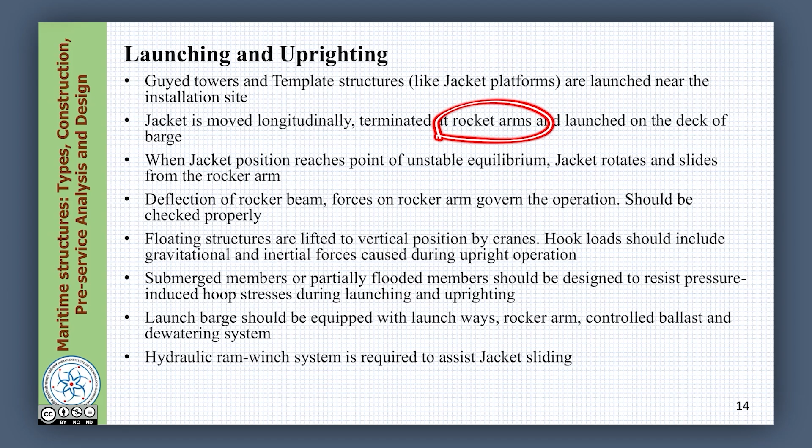We know that, is it not? As I keep on, look here, this is the barge tip, the rocker arm. So, keep on sliding the jacket, you will see when the CG crosses this arm, the jacket will automatically rotate, because of its weight. When the jacket moves ahead of the barge, because of its weight shift, it automatically rotates on the rocker arm. So, the rocker arm terminators will help to rotate the jacket automatically on the barge.

The jacket rotates and slides from the rocker arm gently onto the barge. But in this case, the deflection of the rocker beam and force on the rocker arm governs the design now, because if the rocker arm crushes or the rocker beam is not able to take the load of rotation, then it fails. Okay, it gets stuck there. So, one has got to also look into the design of these and they should be checked properly.

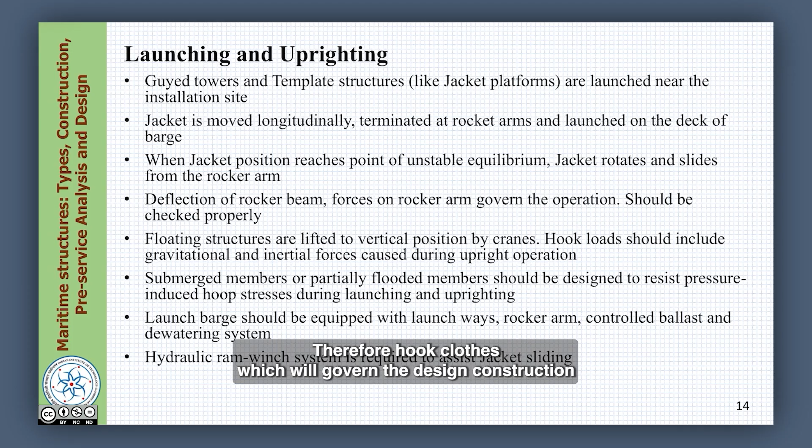Launch barge should be equipped with launch ways, rocker arm, control ballast facility and dewatering system to maintain the stability of the barge during launching. A hydraulic ram-winch system is required to assist jacket sliding.

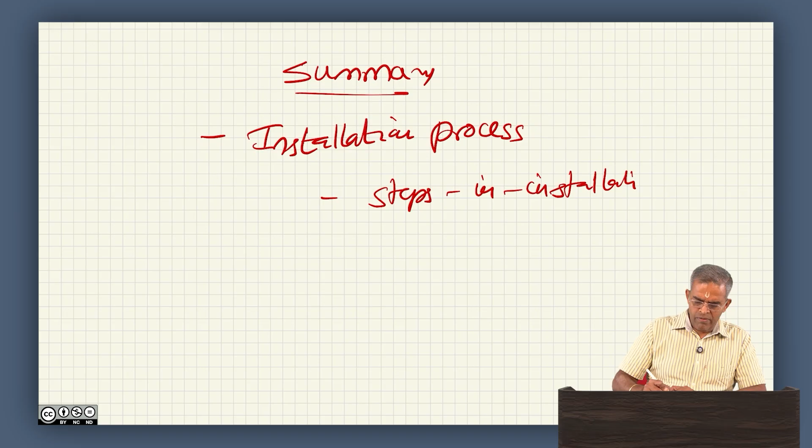So, friends, let us come to the summary of this lecture. In summary, we learned the installation process and understood the different steps involved in installation. We learnt it with an example of a jacket structure, but they are more or less common to all large floating structures like guyed towers, gravity based structures, etc.

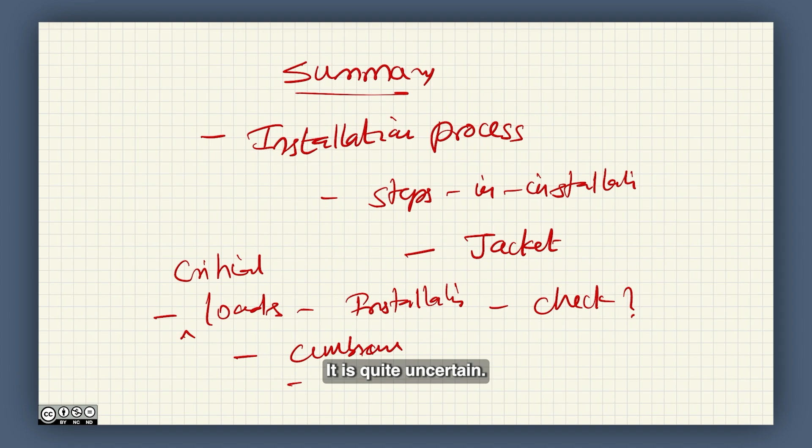We also understood the different critical loads that act during installation, and what loads and design elements should be checked. We understood that the loading operation is quite cumbersome and quite uncertain. Therefore, various design checks are necessary to ensure safe installation.

So, friends, I would love to show you a video where a real time installation happened, but because of strategic reasons this cannot be shown to you. However, there are short videos available in the open domain. I will urge you to look at them conceptually to understand, and then correlate the contents of the lecture to understand the engineering perspective behind this lecture.